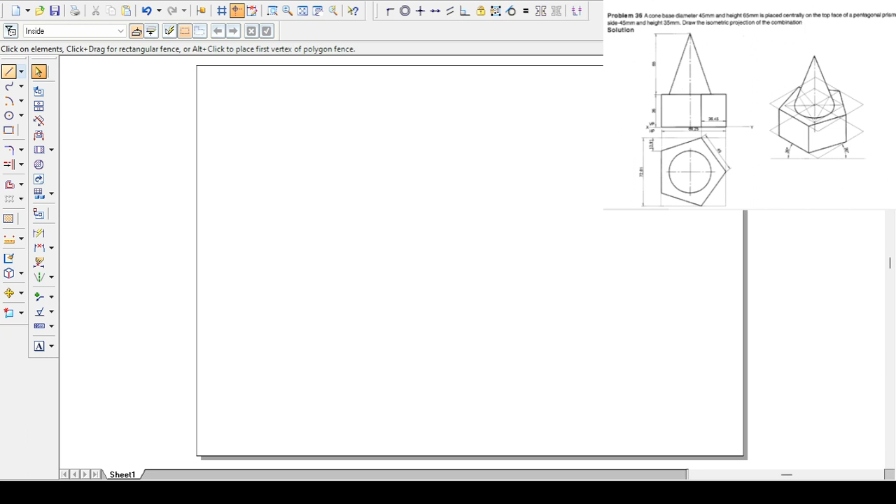Let's start this one. First thing, I'm going to draw the pentagon, regular pentagon. So for that I need to construct a rough pentagon. Roughly I'm going to draw a pentagon whose side length is 45 mm. The included angles I'm going to set 108. This side also 108 I'm going to set. Using the equal command I transfer the property of this measured side to all the remaining sides.

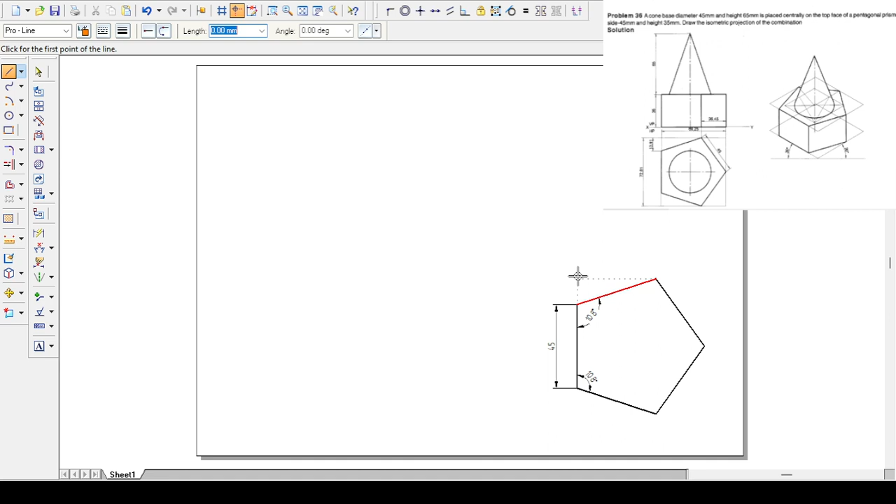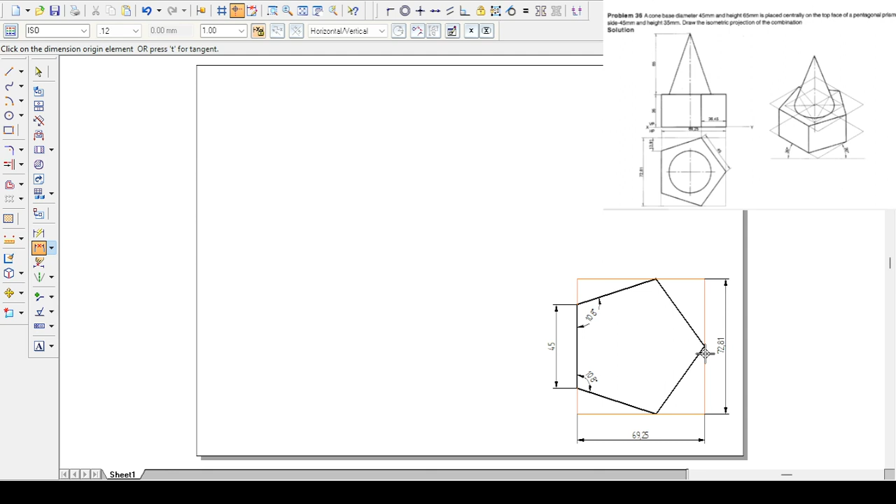Now by taking the line I am going to create a rectangle or a box, which is definitely a rectangle in this case. With the help of the alignment indicator I am creating the box. Now let's measure the dimensions of this box. This corner is exactly to the center, so I am not going to measure this one. This corner I am going to measure and keep here, so that this corner also has the same distance, so twice I can utilize this distance to generate the corners. Then again these two corners have the same distance from the end of the box edges. So any one side you can just measure and keep here.

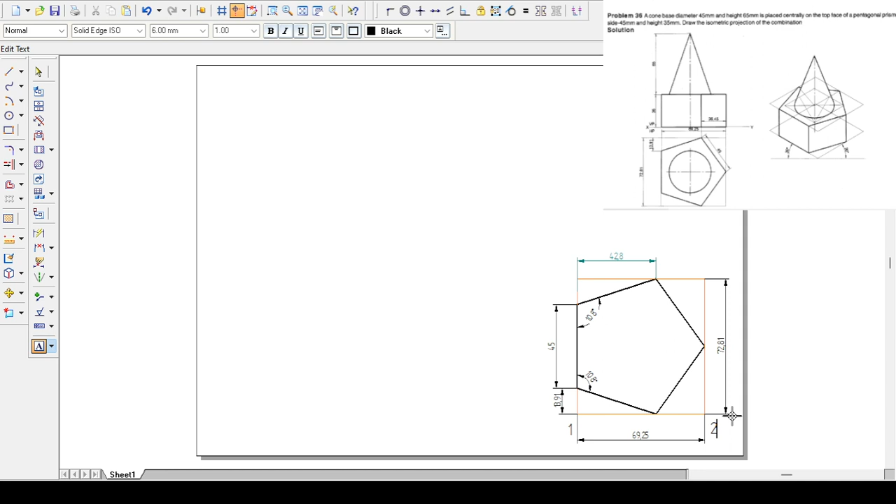Now let's draw the isometric box. Before that, for convenience, I am going to give some names to the corners. Corner number 1, corner number 2, this is 3, this is 4, and here I am going to start with corner number 1 of the rectangle. Now 1 to 2 I want to move, take the line here. So 1 to 2 the distance I have is 69.25, and angle is 30 degrees.

Now 2 to 3 I have the distance 72.81 and angle is 150 degrees. Now 3 to 4 I have the same distance, because this is perfectly a rectangle, opposite edges are equal. 69.25 again, angle is minus 150 degrees, and finally 4 to 1 the same distance 72.81, and angle is minus 30.

Now this corner I want to create. For that I am going to use the arc by center point with a distance. As I told, these two have the same distance, 42.8. Arc by center point, this is the center, radius 42.8, and cut the edge of the rectangle. The same thing I can draw on this side also, 42.8. And I know that this is exactly at the midpoint, so I will take the line here and mark the line to the midpoint.

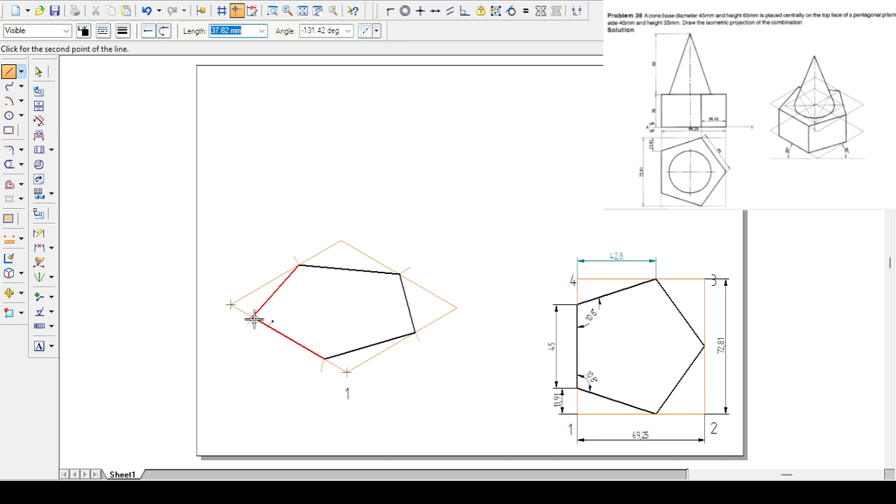So once it is constructed, I can remove these partly left arcs.

Okay. Now from the question, the height of the prism is 35. Here simply what I will do, I will use the move option. I am going to select this entire box. Then copy must be on. Click on any corner of this box and lift it. So X movement 0 I am going to enter and Y movement is 35,

like this. So now, by using the visible line or construction line, I can connect the visible surfaces of this prism. The hidden part I don't want to keep here, so I'm going to remove this one.

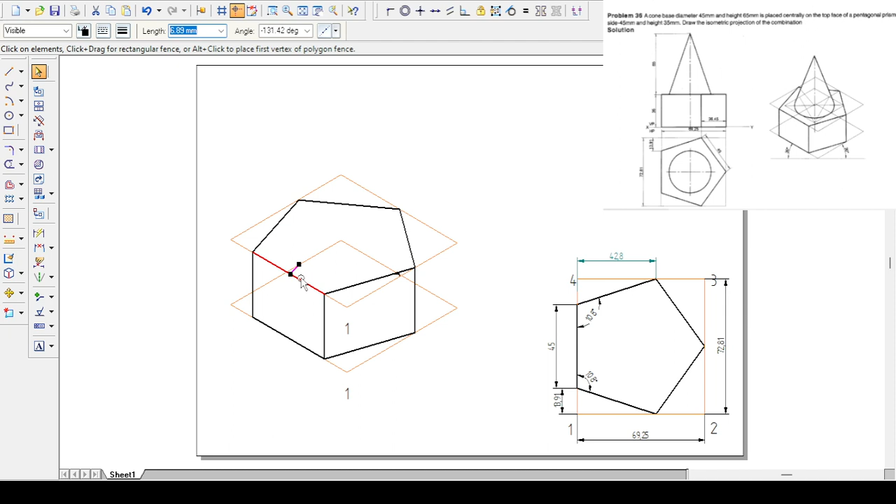Okay, over the surface of this one, I need to place the cone whose diameter is 45 mm. This one I'm going to create separately. Then I will find the center of this top surface of the prism. Over that I'm going to place it. To construct it, again I need to construct an isometric box. The box side is equal to 45 mm and height is 65 mm for the cone. That one we will utilize here.

So here I'm going to construct a box, 45 length in 30-degree direction. I will use a different line type so that I can differentiate visible lines, thin lines, construction lines, projection lines, like that.

So 45 is the length, angle is 30-degree, 45 length again, angle is 150-degree, 45 length, minus 150-degree angle. Connect back to the initial position.

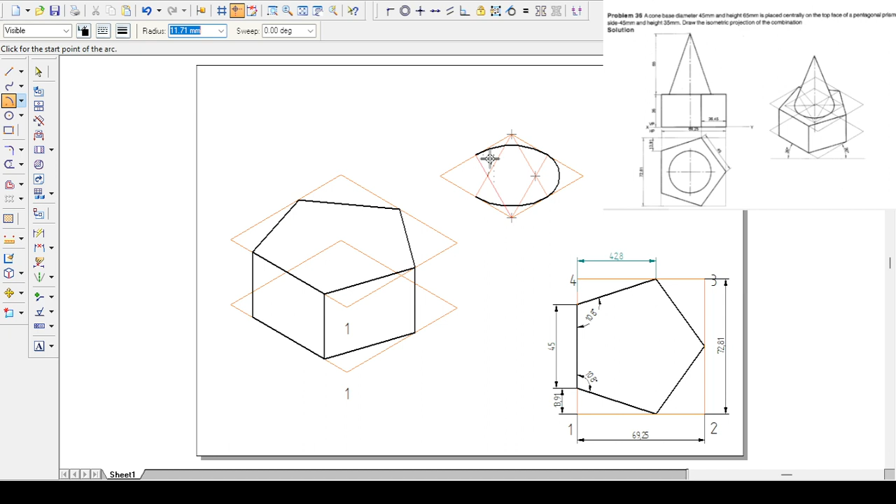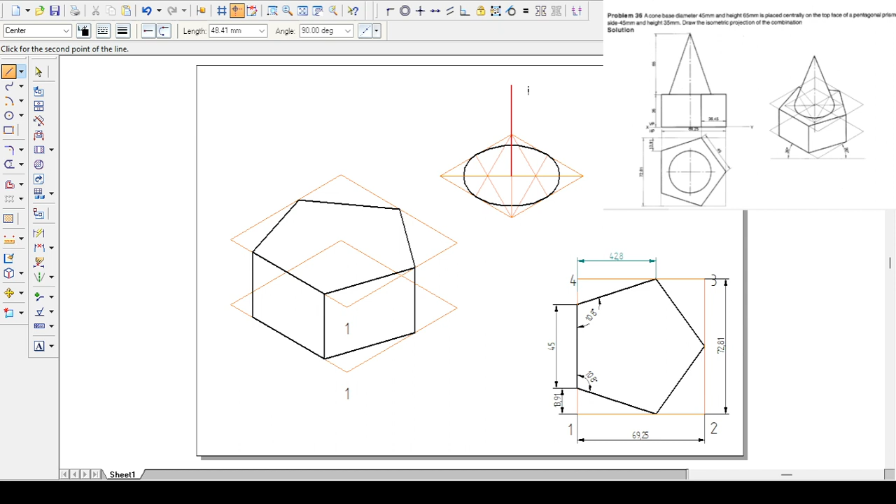Okay, let's find the center of this one in order to give the height of the cone. From the center, the height is given. Height is 65 mm. So in vertical direction, 65 mm is the height, in 90-degree direction. Now by using the construction line, I'm going to connect this one tangentially.

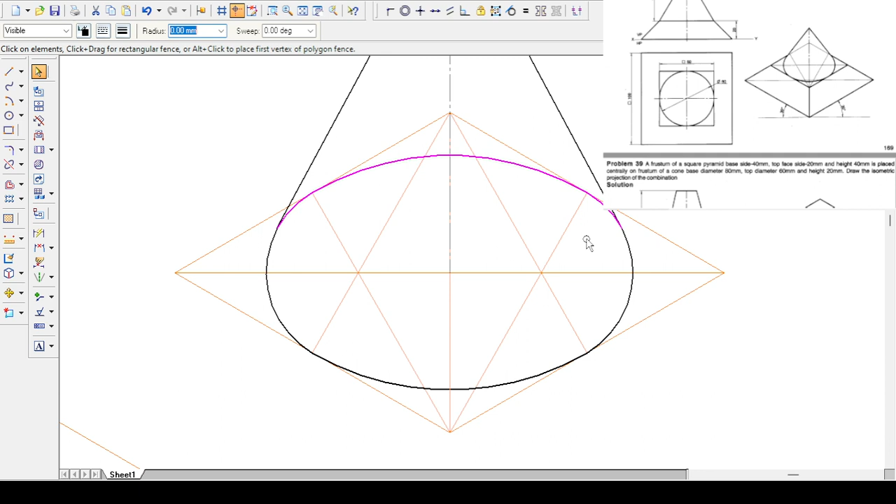Here also once again, let me zoom out this area. I don't want to keep any hidden surfaces. So for that, I need to use the split command. This arc I need to split at this point, this arc at this point. Now I'm going to remove the hidden portion of the base of the cone. It is ready to move here.

So here, how to find the center point of a rectangular isometric box? For that, we can simply connect the opposite edge midpoints. So there we go. We can see this one, the center of this. So now let's use the move option.

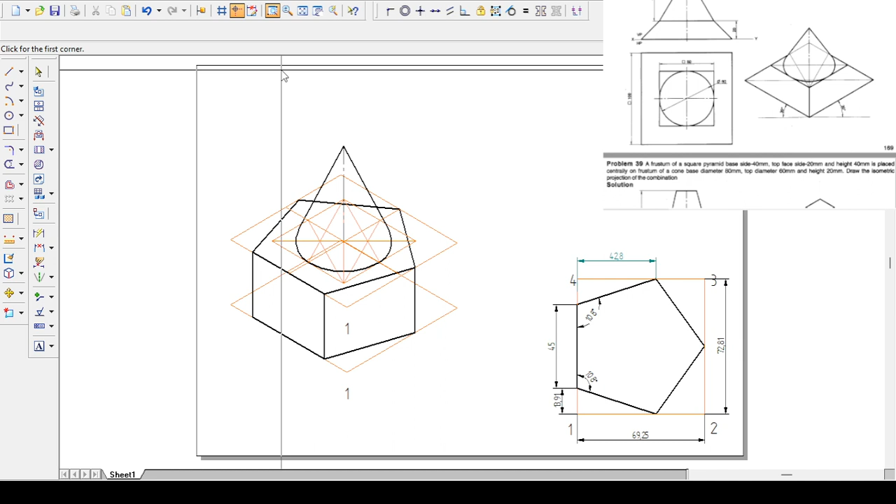Select this solid, pick it from the center without copy. So here I can just place it exactly at the center. This is how the solid is placed. Then once again, the hidden portion of the prism here I'm going to remove.

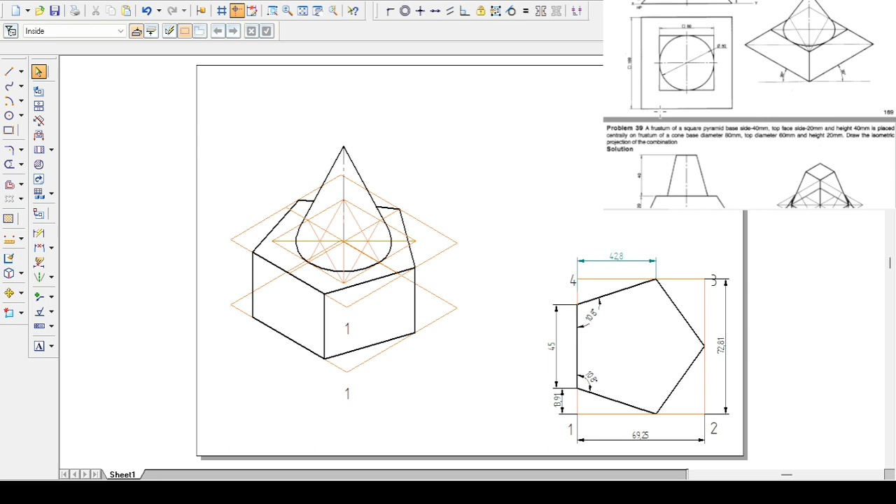Okay, the exact view we got here. Last step, I'm going to reduce it. So far I used the true length, so this one is called the isometric view. If I use the scale and reduce it by scale factor 0.815, I can convert this one into isometric projection.

So I am using scale, selecting the entire combination, and in this field here 0.815, this is the scale factor, and copy off and place it. Now I will draw the line here in order to show this is in 30-degree direction.

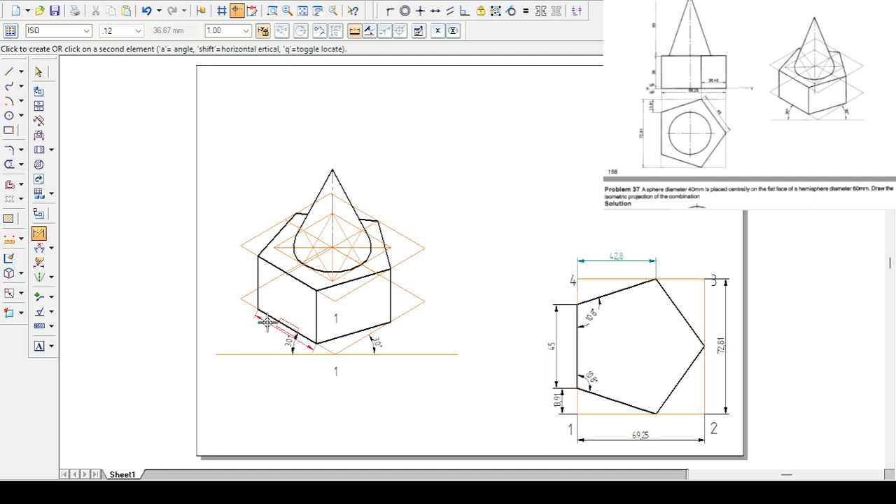So still we can measure the dimensions, like this side is ISO 45. So for that, I will change this one into ISO 45. Then the height we can show, this is ISO 35.

Then the axis length of the cone. This is what we have, the 65. Let me check. Yeah, it is 65. ISO 65.